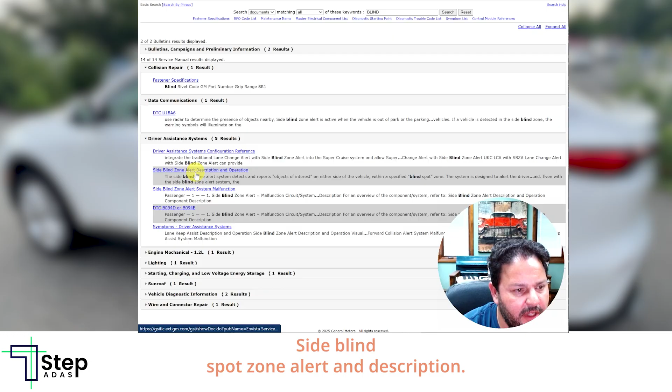Okay. Just going to type blind, see what comes up. Collision repair, fasteners, data. We have some codes, driver assistance systems. Side blind spot, zone alert, and description. This is probably something you're going to want to read to learn what the system is about and how it works. We have a malfunction in here, some codes, and some symptoms. We can look at those if we would like, just to get more of an idea.

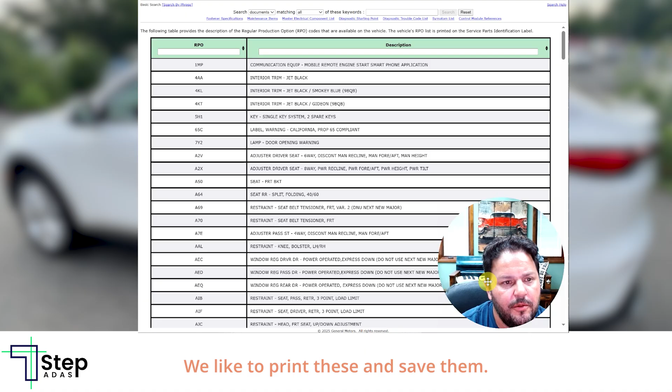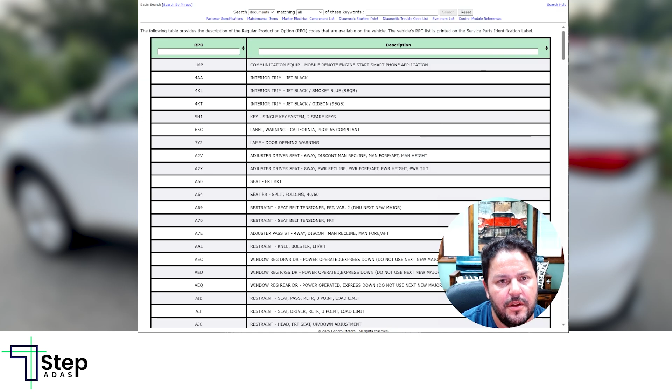One thing we also like to do is check the RPO codes. These are the build codes used for this vehicle. We like to print these and save them. I will use full page. Let's see what that looks like with this on here. Should be interesting. I wonder if I should remove it. Let's see what it looks like. Oh, look at that.

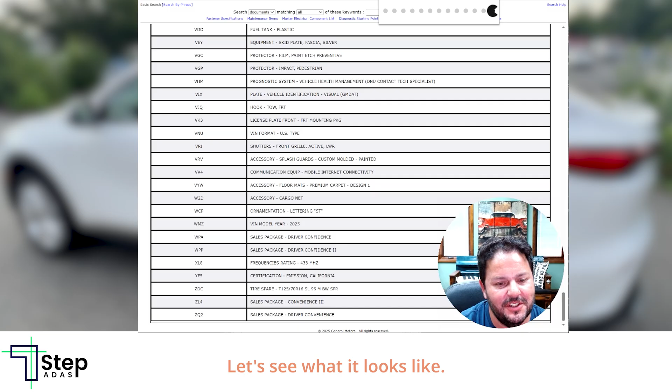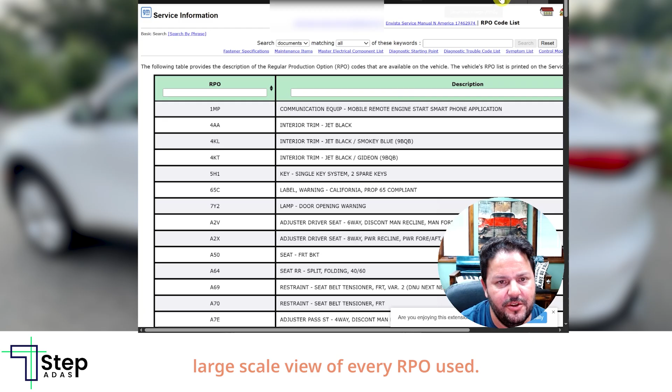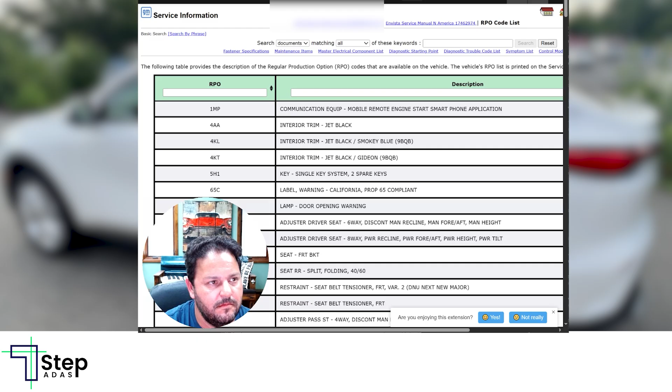Now we have a large scale view of every RPO used. We can save this like so. So we might want to save this as a PDF. As an image, this is probably overkill. We save it as a PDF and then we can attach it right to our work order here. We would just PDF it and attach it to our work order like so.

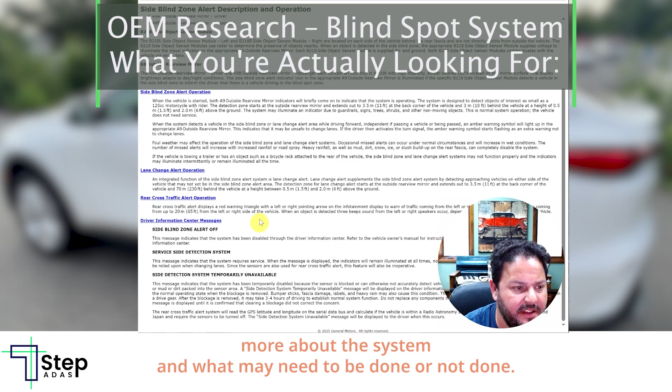This way we always have access to it and we can refer back to it later on should it be necessary. Now going back into our documentation, let's go into zone alert, description, and operation. Here we review all the information that GM has and understand more about the system and what may need to be done or not done. As always, we save our PDF so we have our information.

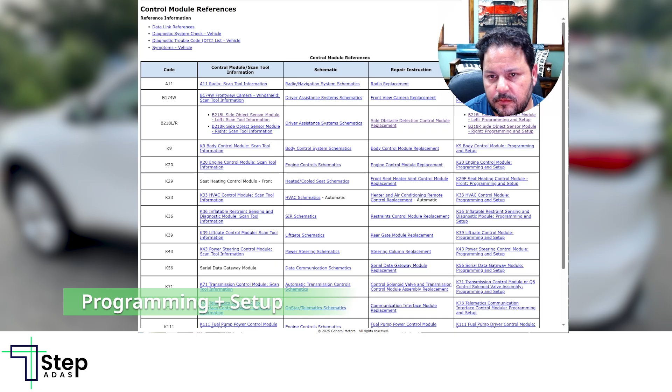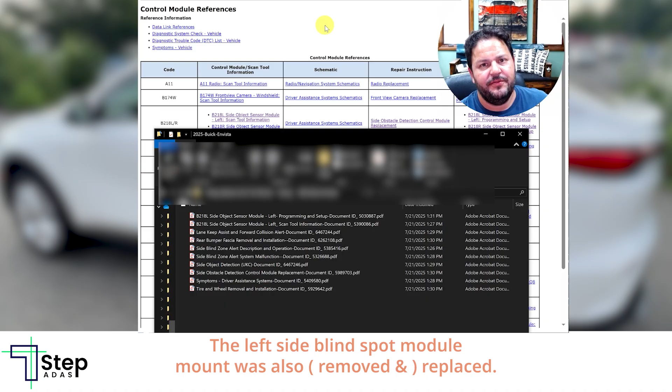To recap what we did here today, we paid for our AC Delco TDS subscription. Then by VIN number, we looked up the rear bumper and the rear blind spot. Now, the reason we did that is because all of the damage on this vehicle was in the rear. The bumper had to be removed and the lower valance had to be replaced. The left side blind spot module mount was also replaced.

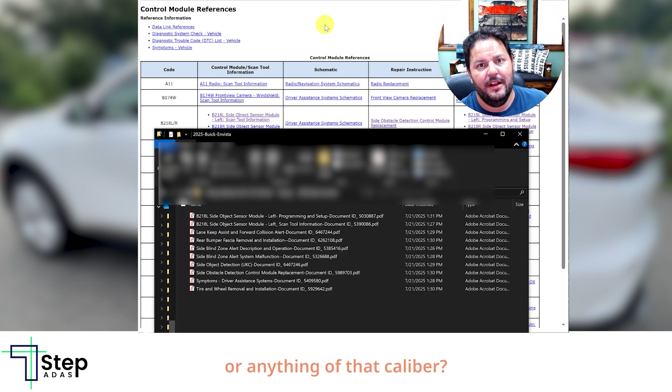What we wanted to do is check all the GM instructions for what happens when you remove and replace the bumper. Do you have to recalibrate or reprogram the original sensor that was reused? Should you replace it, considering the impact was kind of near there or anything of that caliber? You also want to look for any references that indicate you may have to replace the item when changing the bracket, or if impact happens near the item in question, things of that nature. You have to actually read this information or else you don't absorb it or don't understand it.

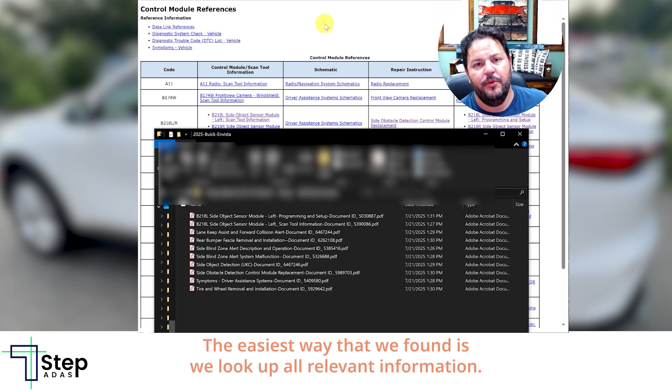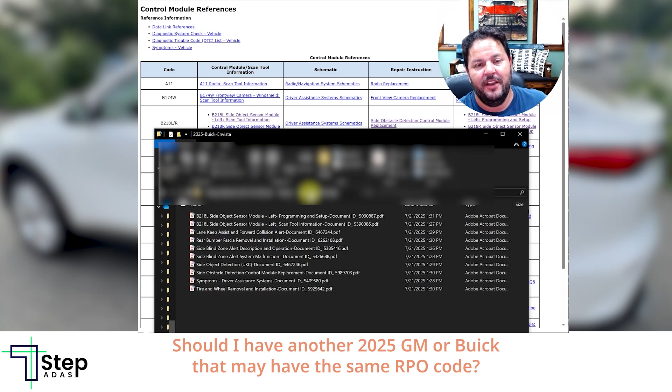The easiest way that we found is we look up all relevant information. We then save the PDF so we always have access to them. We have a network share by year, make, and model where we have all the information set up. I'm showing you a very simple way to do it here. This PDF folder, for lack of a better name, is always available to me, so I can reference it in the future should I have another 2025 GM or Buick that may have the same RPO code that I just want basic information on. What you saw here is me log in, by VIN, drill it down, find all the information related to the rear bumper and the rear blind spot, and save it all.

I'm going to do one last check for any ADAS information that may be missing or any collision information. And then from there, I'm going to double check it, hook up GDS, check it for codes, drive the vehicle, and confirm everything works.

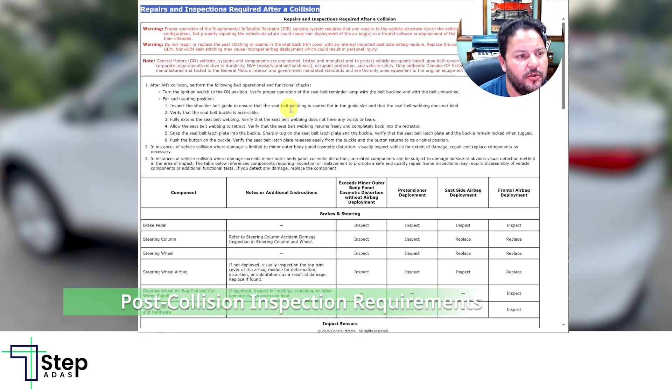Here is the very important GM document that tells you repairs and inspections required after collision. Nowhere on here do they state minor or major collision. It just states collision. So these are the things that should be checked after each accident to ensure that there are no issues.

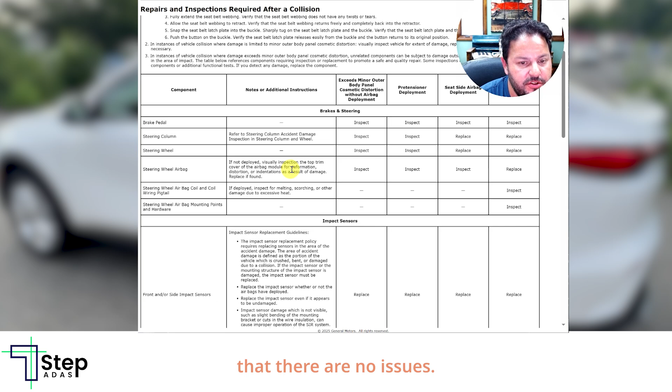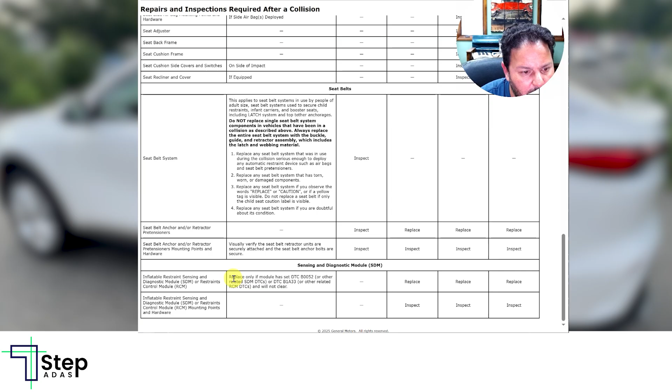I'm satisfied with what we found for today. Using the keywords ADAS and collision, we were able to find some relevant information in case the insurance company asks why we did certain things. Looking up the rear bumper, we got a good idea for what we need to do post-collision fix to check it for calibrations. At this stage, I have all the information that I think I'm going to need, but I still have 2 more days on GM system should I need to double check something.

What I'm going to do now is sign up for GDS, hook up the car, do a pre-scan after the collision repair has been done. If there are no codes, test drive it, confirm that everything's working. I will probably do a reprogramming sequence on the left blind spot module because it was removed and put back into place, but I want to see what the scan tool says.

Without being able to pay for GDS and get access, I really have no idea what I'm going to be able to do and how it's going to work, because this is a gateway locked vehicle. So your Autel probably will not work. The Texa, I know it definitely will not work, and I'm not familiar with any other scan tools at the moment. But I know with those two, I'm going to have an issue. I'm just going to pay for GDS and keep this moving.

This is how you find basic information related to an accident. You don't need special services. You just need good repair information and about 10 minutes of time to dig through and save however is best for you at your location.